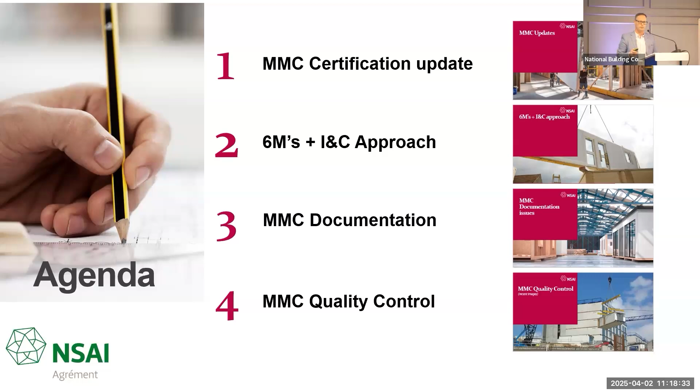So if I just move in on the updates, we have to go back to technical guidance document Part D. That is where NSAI is referenced in MMC certification. There is no European, there is no global standard for MMC. Yes, the BSI published the PAS 8700, but it's only for residential construction and it's only a publicly available standard. So for us to accelerate, what's happening is rules and regulations are trying to catch up with the advancement and innovation happening in the modern methods of construction space. It's for any new or innovative building materials, systems or processes, and that's where Agrément comes into place.

We were mentioned in the Programme for Government. We're here to support that, and to bridge the gap, because there is no CE marking standard for MMC, and it's only for products. But we're looking at the whole building systems, all 67 building elements, the walls, the doors, the frames, and we're also looking at the interfaces. So like what the previous speaker showed you, the connections, the points of connection, the interfaces - they're the challenges for us.

And then there is a European technical assessment, but that is like a visa - it's only a visa to place the product on a European market. It's not your passport to install, because you have to look at the different climatic conditions and locations. We have radon, but we don't have the seismic activities that the Italians have. We had the storm Éowyn recently - they don't have that on mainland Europe in some cases. So you've got to adapt your systems to the area, climatic and local conditions.

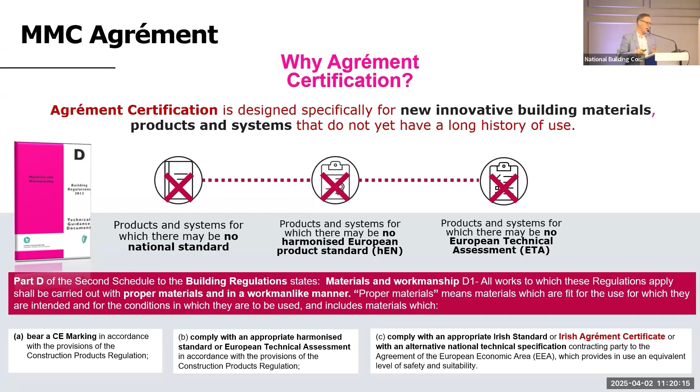And that's set out in TGD Part D. You then can have an Irish standard - we only have IS 440. There is a 3D concrete printing standard, but it's an ISO ASTM standard, and it's only general principles, so it doesn't cover all 3D concrete printing applications. And then you've got the Irish MMC certification, which is to bridge the gap where there are no standards and regulations that I talked about.

But looking at the different companies, what I want you to look at here very carefully - I haven't named the companies, but you can see the date of application and the material type in the second column. I also want you to look at the notes. So we have 7 stages within the MMC certification process, and a lot of them are in technical review, but some don't come back to me - no correspondence since September 2024, no correspondence in 2024.

We constantly reach out to these organizations. They've made an application, they've paid a fee, and in some cases they've signed a contract with us, but there's no movement. And I can't make the move or move forward with them.

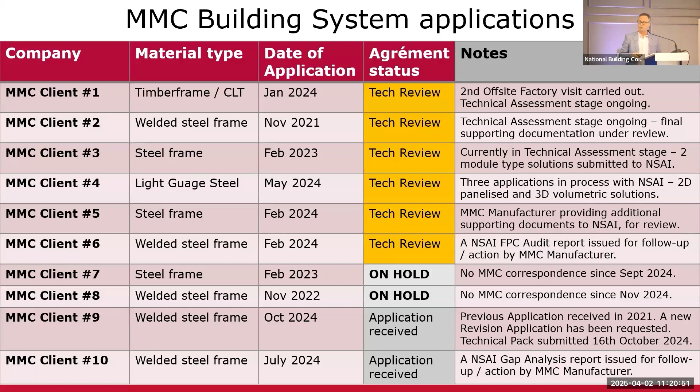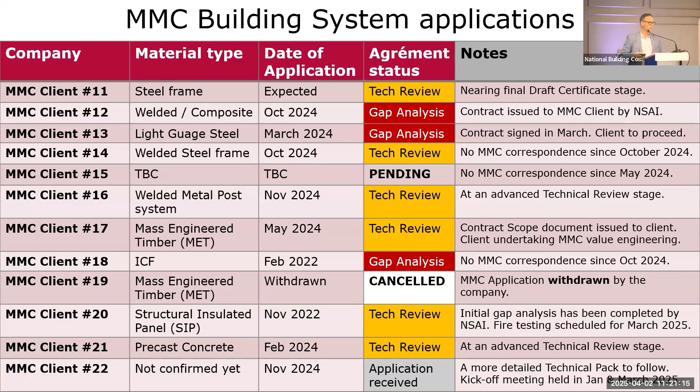Then some withdraw their applications, or some want to put it on hold. We will have a kick-off meeting with them, and we will work with the off-site manufacturers as best we can.

There's different ones that have moved to gap analysis, and for us, we want them to get to the factory production control stage. This is where we're validating all their documentation, all their design, all the good stuff that they say they have. We want to verify that both in the factory and on site, and that's where the challenge starts coming into play. But you can see where they're at, hot rolled steel.

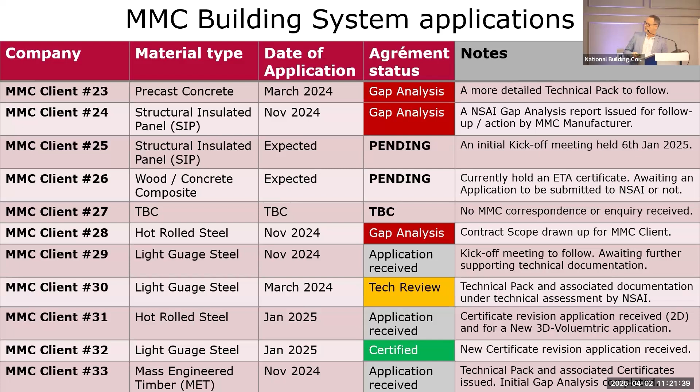It's predominantly very much welded steel frame systems, and then some people are just pending their application. It takes about 6 to 9 months from them making an initial inquiry to NSAI before they come into us and start the process. Then we do a gap analysis initially on what they submit, and it takes another 3 months before they start giving us a really detailed technical pack and we sign a contract with them.

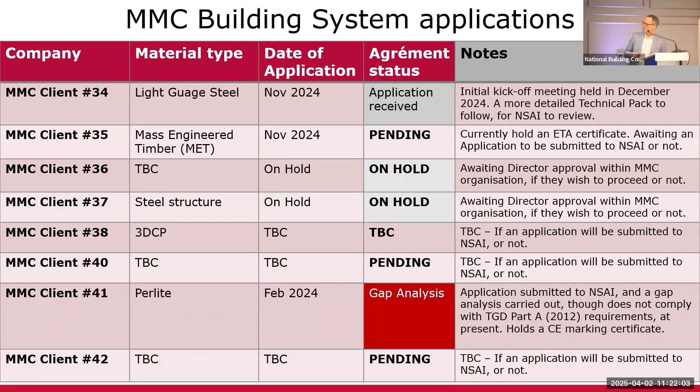So this is the challenges we're starting to see out there. For us, the summary is we want them to engage with us, keep reaching out to our team. We're available, we're contactable. A lot of people have my name and number, they call me, whatever, we're happy to keep that process going. We're here to work with you. We were set up in the NSAI Act 1996. We're also in our NSAI strategy to support SMEs, and we're in the programme for government to improve MMC certification. So that's what we're here for.

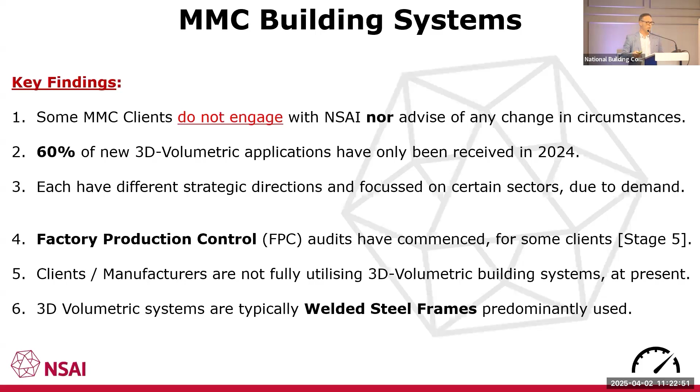What we're also seeing is only 3D volumetric systems have only started in the last 12 months, that's where it's starting to come into it. It's predominantly 2D panelized systems. And what we see is when we get to the factory production control stage, we're at stage 5 of 7, that's a real positive stage. That's when we know the factories are getting ready and they're going to be getting close to certification. We're looking at welded steel frames predominantly, although there's some mass engineered timber starting to make its presence here, possibly due to sustainability targets.

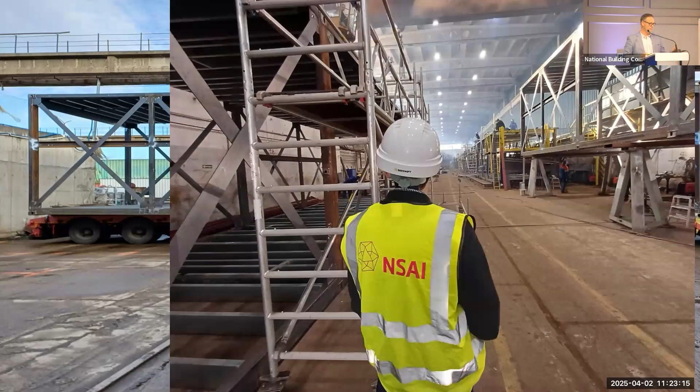This is myself visiting a factory over in Poland. That's the size of the module, 16 tons, not even cladded. When it's finished, it's going to be 30 tons. That was going to a hotel, and this is courtesy of our client. You can see the size and everything we have to look at. This is looking down at the factory, this is one half of it, and there were 4 of them. You can see all the modules laid up all the way down the side and the guys working away in the crew.

This is some of the email comments I get back when I reach out to off-site manufacturers. Apologies Martin, I'm working through the list that you gave me, I'm engaging with our clients and we hope to get back to you soon. Martin, thanks for reaching out, thanks for your voicemail, thanks for your question, but we're not in a position to actively push forward with Agrément certification. However, can we keep our submission on hold?

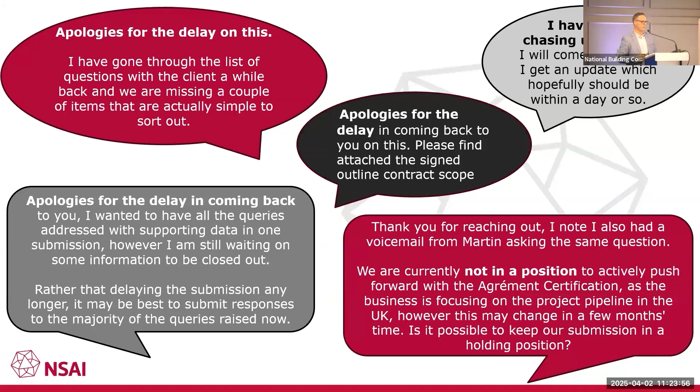This is the type of stuff we want to work with off-site manufacturers on, we want to work with them, but I can't move if they're not going to move forward. So it's a two-way street. You've got to come forward and present your documentation and we'll move forward with you.

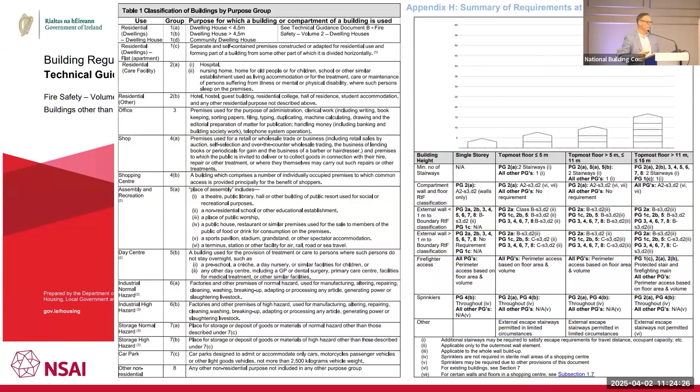What people always say is Agrément is not a one price or one fixed contract. No, it's not. It's based on the different purpose groups, it's based on the different heights of the buildings, it's also based on the material technology and types, it's also based on the scale of the operation. So therefore it can't be a one size fits all, it's not a one size fixed price, fixed term contract. We need to scope that out with the various offsite manufacturers, and then that will determine the length and depth of the certification process and technical assessment we have to carry out.

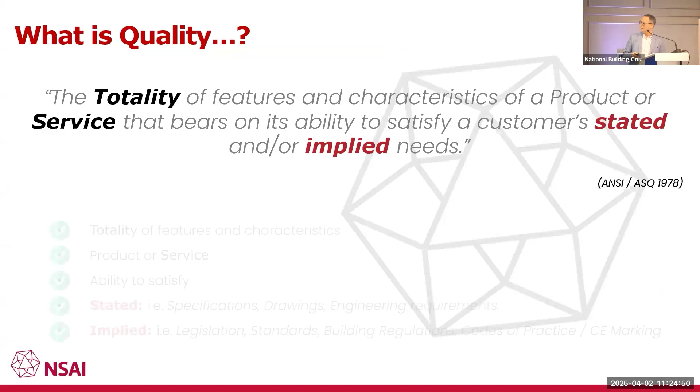This is the 6 M's plus I and C's, so I'll explain what that is in a minute, but I first want to talk about what is quality. This is a definition that holds true from 1978, and it still holds true to this day. It's the totality of features and characteristics of a product or service that bears on its ability to satisfy stated and implied needs. Very chunky, but I'll break it down for you. It is everything you do, the end-to-end process. It's no different to farm to fork, it's factory to site.

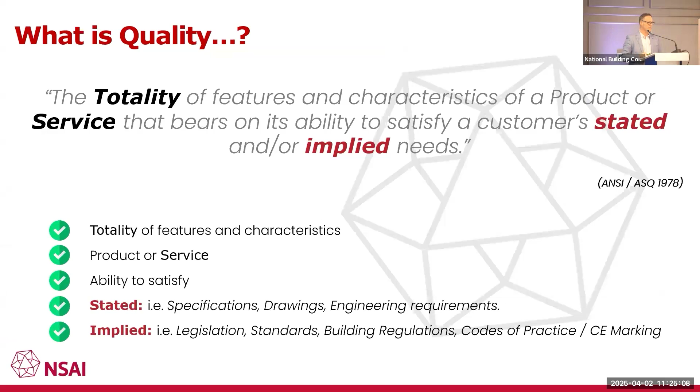It's the product that they're manufacturing, it's the ability, but it's not just the specifications, drawings, engineering, design. It is the legislation, the regulations, the standards, European directives, and the CE marking. It's everything to do with that, and the building regulations that we talked about earlier.

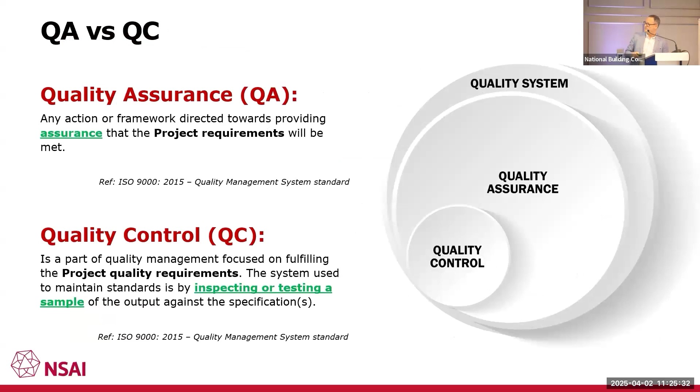Then you look at quality assurance, quality control. Everyone gets mixed up on this. The first one was quality management system and approach, but this is a definition from ISO 9000. It is an action or framework directed towards providing assurance, and quality control, as I always look at it, is materials and workmanship, both off-site and on-site, and how you control that. And it's inspection and testing of those samples. So you're taking a sample of that in the inspection process.

How that looks is we're providing a quality assurance scheme that is relied on by you as the certifiers, the regulators, the warranty providers, the insurers, and the regulator, the building control. And that's where it comes in.

But the BCAR is only on a project-by-project basis. So an example I give you, BCAR is not going to go to a factory in China. Are you going to travel over to China to look at some of our clients? Are you going to go to America? Are you going to go to Poland? Great if you are. But who's going to do the off-site inspections? Who's going to verify that? Who's going to validate all that documentation?

We get huge packs, over 10,000 pages on documentation. I'm happy to give it out to anyone here for them to digest and review technically, or you can rely on the Agrément certification to do that for you and support that. And that's what we hopefully rely on, and we want to work with people on that.

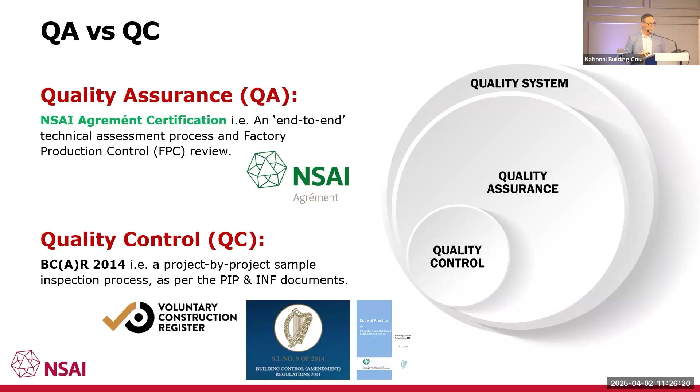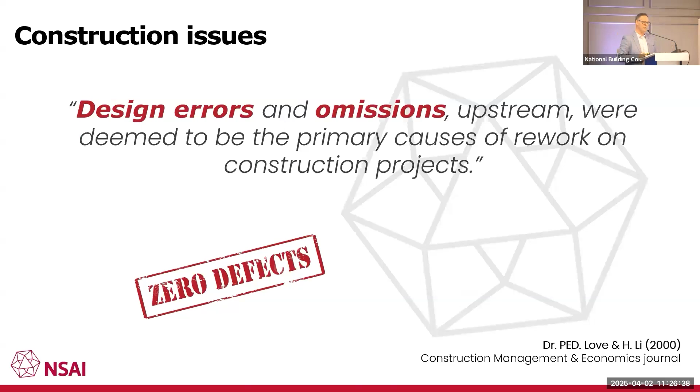And then I always use this definition. This is from Dr. Peter Love and Heng Li. They've written over 400 construction journals. He's in Australia and Heng Li is in Hong Kong. Design errors and omissions are the primary cause of rework in construction. And that is proven in multiple papers that they've published. And that's what we're trying to avoid.

However, when you start into multiple sectors, you start bringing in additional regulatory requirements. So we have the TGDs Part A to M, but then you start going into Design Manual for Quality Housing. There's this new standardized approach that Construct Innovate are doing, looking at different acceptable details for the likes of light gauge steel or other ICF for different connections, but you have the schools design guides. So an offsite manufacturer in the residential sector cannot just pivot into the educational sector just like that. There's a whole series of other requirements and regulations. No different as you start moving up to the data center, the biopharmaceuticals, and then you have the healthcare, HTM standards that was on the National Children's Hospital.

So it's not like for like here. This is where people start telling me it's like Lego and it's nice and simple. There's a lot more variables to this than just what I'm trying to show you. I'm trying to show you the length and breadth of this and how detailed it is.

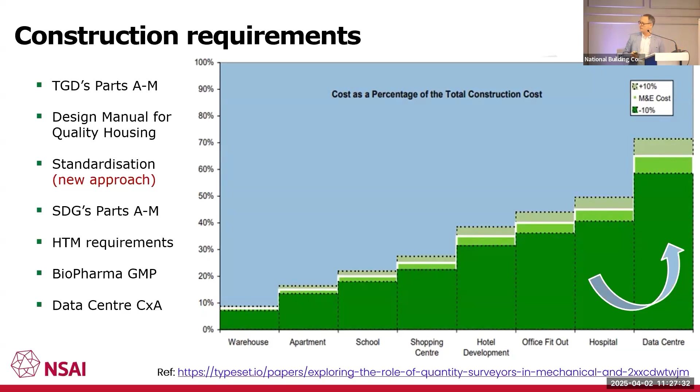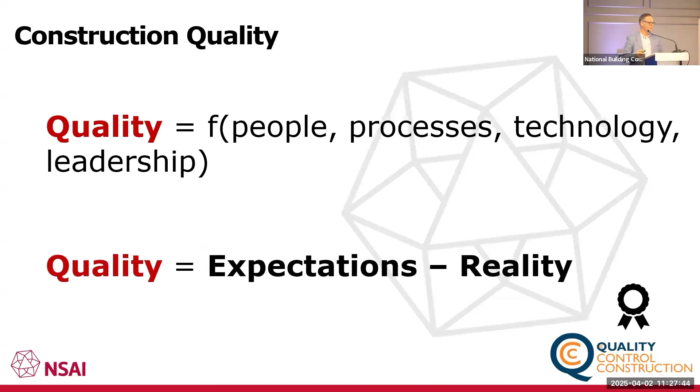For me, quality is a function of the people, the process, the technology, leadership, or more simply, quality is expectations minus reality. What are you actually getting for your off-site manufacturing, and what in reality is arriving on site, and is it fit for purpose and in use.

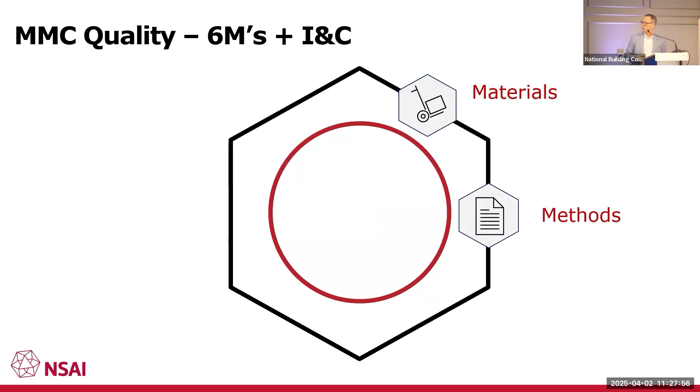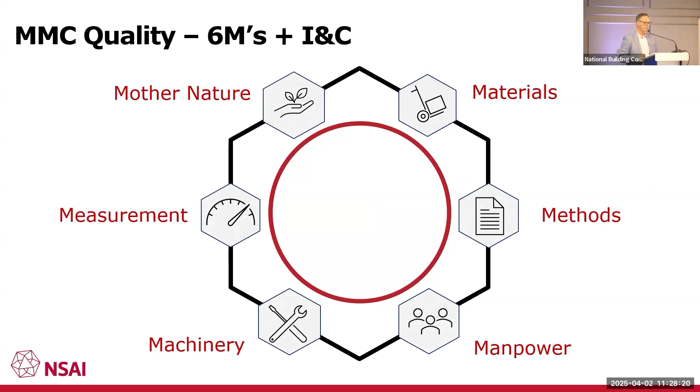So what I always do is 6 M's plus I and C. I look at the materials. I look at the methods that they're employing, both on-site and off-site. I'm looking at the manpower, the competency of both the design team, the professionals and the trades. I'm looking at the equipment, the tools. Is it calibrated? Is it verified? I look at the measurement, and what I mean by that is inspection, testing, quality control records, the checks and balances. And I'm looking at how the weathering, the protection, and how that product will interact. Is it UV rated? Is it going to degrade over time? That durability that we talk about.

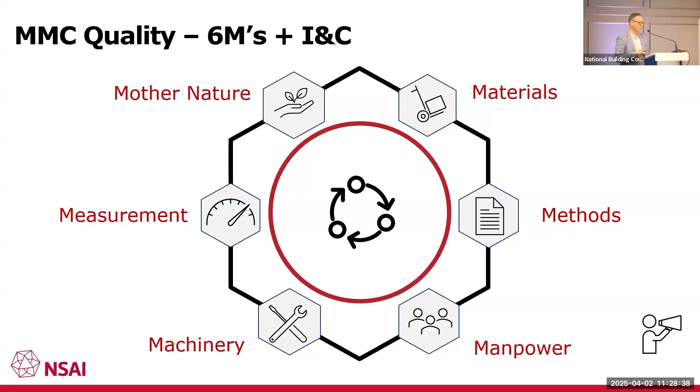And then I look at continuously improving that process, and then how we communicate that. So that's my 6 M's plus I and C. It's project neutral, it's material neutral, it's sector neutral. I've applied this for the last 30 years on all the projects I've ever worked on, and it works out perfectly. I challenge you to try that on your projects and your processes. I'm looking at the specifications. I'm looking at the storing, the weathering, protection of it.

Over, short, and damaged - does the module arrive like that? Has it got something too much on it? Is it missing something? Is there poor interconnection at the interfaces? I'll show you some examples of how this has happened.

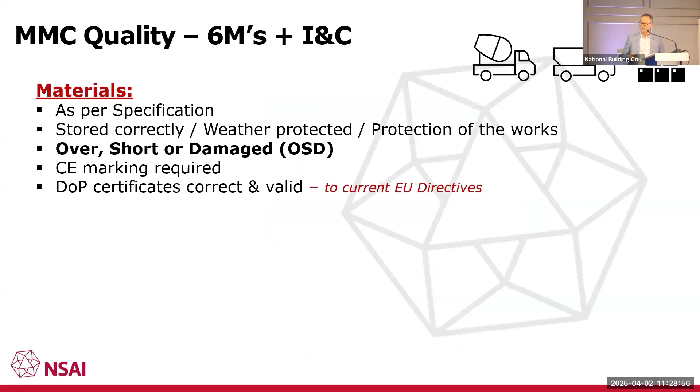Even though we have 3D modeling, this should not happen. Everything should be documented and detailed. Has it got the CE marking? Has it got the declaration of performances? And are they checking it? Is it fit for the essential characteristics?

We're also looking at the contract scope of works. Has there been any variations and changes? Looking at the models, requests for information, technical queries, and we're keen on the standard operating procedures - the offsite manufacturer's processes. We're not here to challenge and question that, but we want to see it. We want the evidence, we want to see the validation and verification of that. Trust me, I'll go into full detail on this.

I want to see it in the PIPs and the INFs. I want to see offsite manufacturing captured in that and the stages of inspection. Where is that? Is it there? I do see it in some of it.

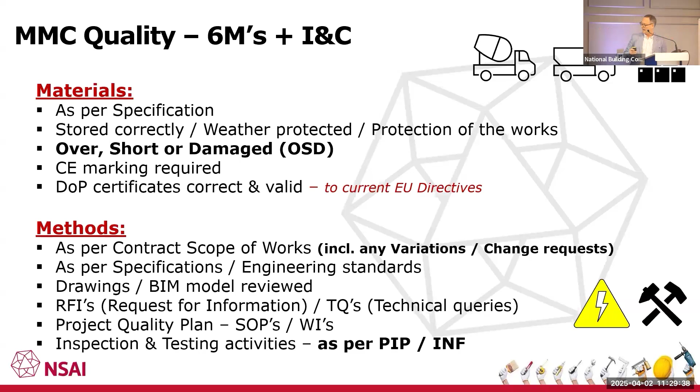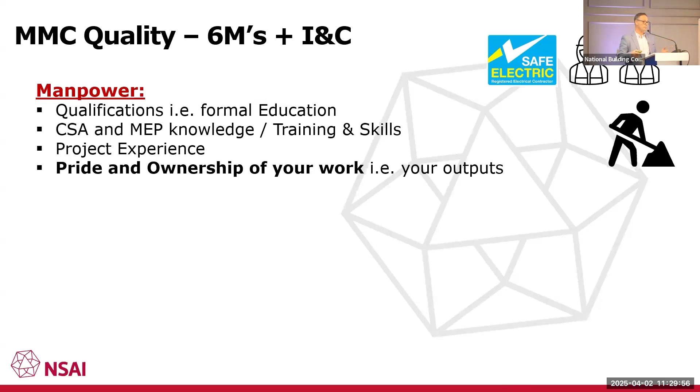I'm looking at the qualifications. What we mean by qualifications is in TGD, the definition - are they competent? Competent means qualifications, knowledge, experience, and skill. That's what we're looking for, a combination of all of them. The problem with experience and skill is modern methods of construction is new, so we all have to upskill, get more knowledgeable around this. I'm learning every day.

And then it's taking pride and ownership in that, but it's also having the right tools to do the job. So we're looking at the torquing, the bolting, the assembly, the points of connection. That's when a modular is going to fail - at the interfaces.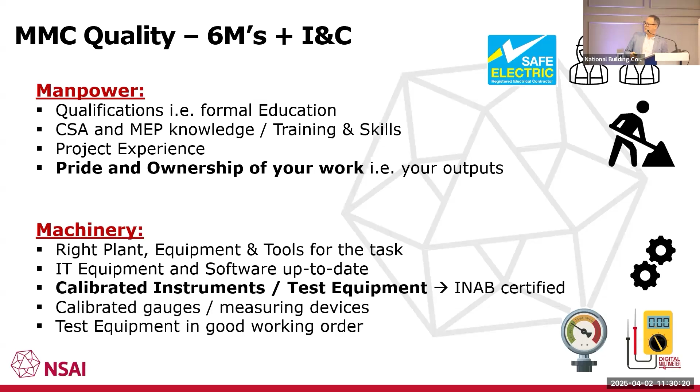If you look at any of the reports over in the UK, it's at the interfaces, where things come together. We're looking at whether the equipment you're using is calibrated, the gauges, and they're all in working order. And then finally, we're looking at the quality control checklist, the test packs, the evidence that verifies or validates - that's the track and trace.

I don't mind if it's pen and paper. I don't mind if it's digital. I don't mind if it's on an app.

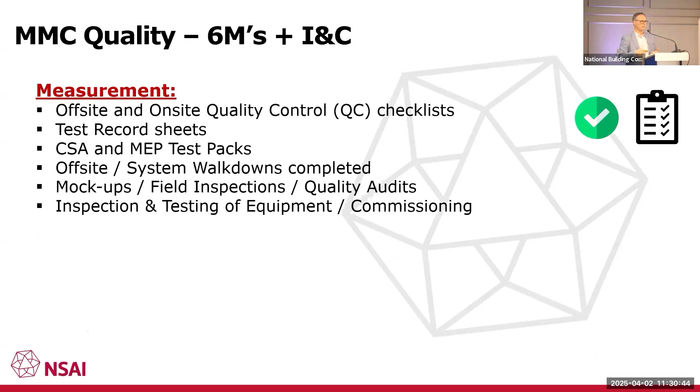But what we do is we go into the factory and they tell us all about these wonderful checks. We get to the end of the process and we start seeing errors in the modules and things. And I said, but you just told me we go through 100% checks - and yet we see gaps and errors in the process and the system.

And then Mother Nature - be very careful. Program affects how people operate. When you start putting things under pressure, people perform differently. So it's the environment, the culture, and that's why factory production control lends itself - offsite, it's a nice controlled environment as opposed to onsite, chaotic, multiple trades. You're also looking at the weather, the temperature, and that's why offsite manufacturing lends itself to drive improved productivity, and that's been proven in numerous reports.

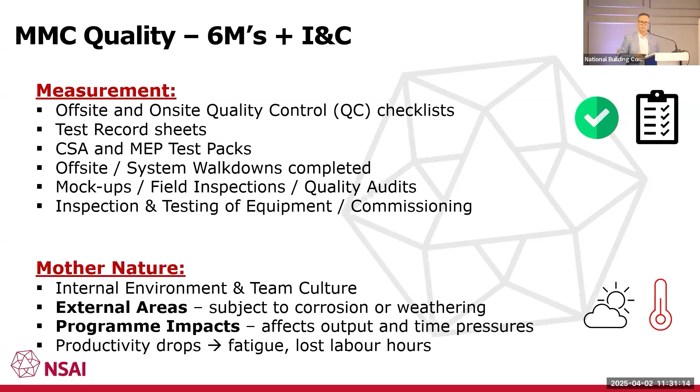And where this all comes from is the fishbone diagram, root cause analysis - Ishikawa, it's been around since 1980, and every time I had a quality problem, one of those ingredients was always missing, one or more. So if you go back to look at any problems or issues you've ever had on a project or site or in a factory, one of those ingredients - you can drill down to it. Don't look at the symptoms, look at the root cause of the problem and drill into it and then try to prevent it. What I do is the reverse of that.

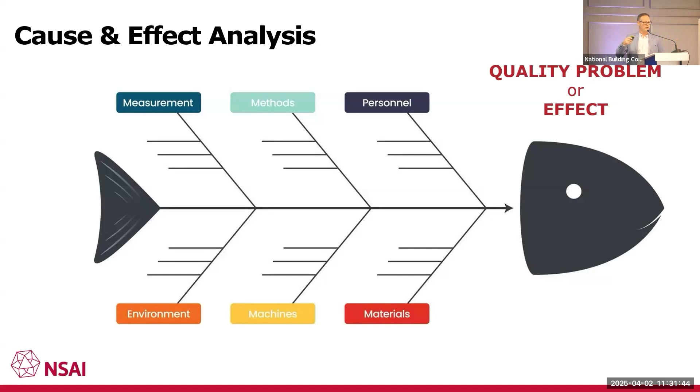So it's nothing new or novel or innovative, it's very simple. What you're trying to do is get into a nice zone of control. You're taking out these sporadic spikes, these unknowns or variables, and you're driving that quality improvement. But what's key is you've got the lessons learned, the feedback loops. So the best organizations are feeding that back from the offsite activities, back into their production, back into their crews, and they're constantly improving.

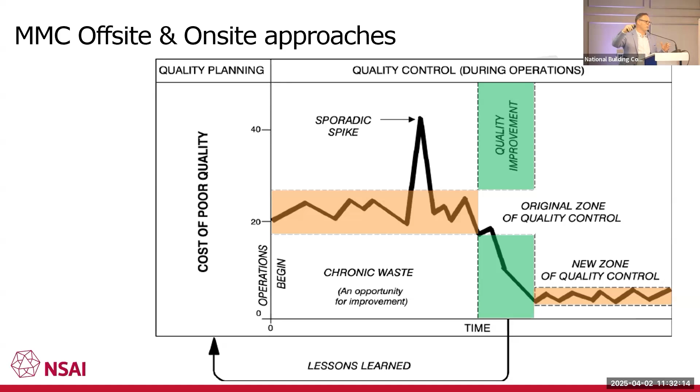You'll see that with the offsite manufacturers - I see a maturity level with a lot of these companies. Some are really good and innovative, and others are quite stagnant and slow and don't take those feedback loops and learn on the process.

Just touch upon some of the documentation that we're starting to see out there and the issues. So we're looking at everything, the durability, the thermal, the structure, the fire, not just the TGDs A to M. We're looking at the competency of the people, the test results, the calculations, the quality control. I'm looking at the end-to-end processes with my team. We're looking at everything. I want to see it all.

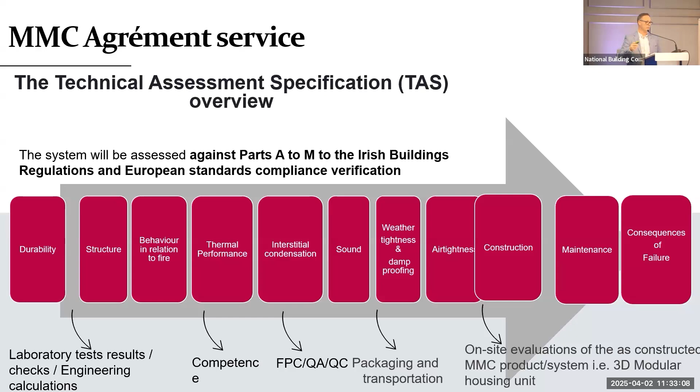I don't care what you do. I don't care how you manufacture it. I'm not here to challenge your processes or what type of material you're using, but I want to see it. Manuals, the installation manuals, and the maintenance around that, because just when the module's finished and installed on site, we want to see how it's maintained post-production and post-occupancy. So just be careful of that.

My three challenges - this is the slide I want you to take away from today. Documentation. It doesn't always match what it says on the tin. The amount of times I get pieces of paper, out-of-date documents, documents that don't match the essential characteristics - I challenge you all to look at this documentation. Look at the devil in the detail. Look at the European Technical Assessment. What does it cover? What doesn't it cover? What's in the manufacturer's instructions? What's in the literature? Factory production control, that's 80-90% of where it is.

So when we go to the factory, it's not bad. It's getting better, it's improving. But we still see errors out there. We see some very basic checks that weren't done or carried out. Small attention to detail - and that shouldn't be happening on the production floor, using the right jigs. But they are improving. The on-site is not where it needs to be. It is not at the standard or level.

It's like a curbside delivery. They drop the modules in, or drop the 2D panelized systems, and a different team or different crew takes it over. The control around that and the interfaces with the various trades is not there. I don't see it as strongly controlled as it would be in the factory, and it's an area that we need to look on.

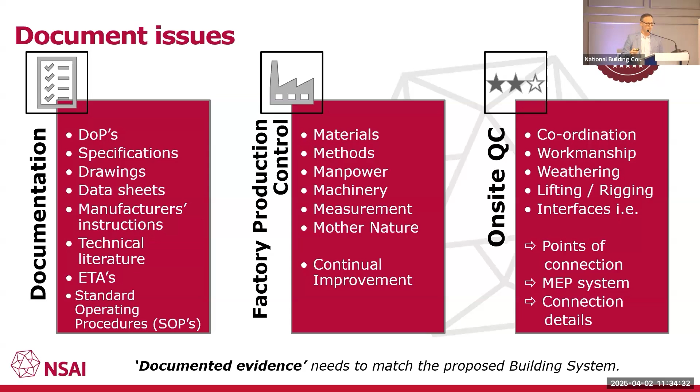We need to look at the points of connection, even the mechanical and electrical, and how that interfaces with the module. I've seen them compromising some of the modules. It was my fear, and that's what I'm starting to see on the sites now. So I will be pushing in on that, and I will be doing unannounced visits on some sites.

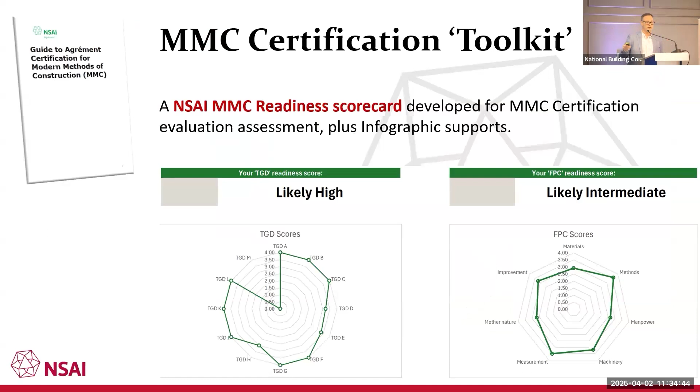We have a readiness scorecard to help organisations. It's very freely available, it's a self-assessment. It's against the TGDs Part A to M, and then it's also against factory production control readiness. We score it against what the off-site manufacturers provide to us, and it gives you a nice radar diagram that tells you where your gaps are.

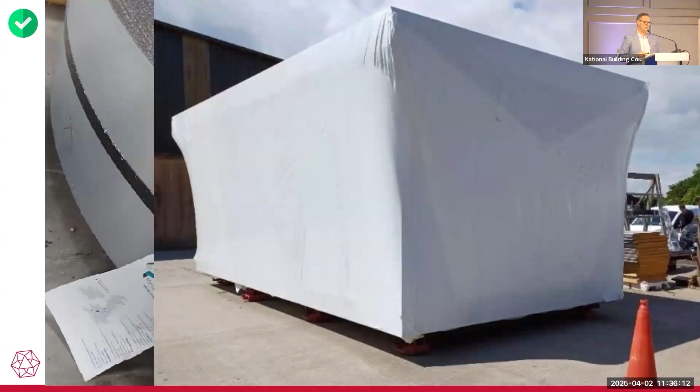And then just to wrap up, I just want to show you some of the recent images that we've seen. We see some good stuff with light gauge steel. We can see the material traceability, we can see the mill certs, and we can see the material. We can also see that they weather the products better. So really good companies are weathering their modules now, and that's what Mario talked about, the weathering of moisture. Moisture is going to be your biggest trouble here with these modules and getting exposed to the climatic conditions here.

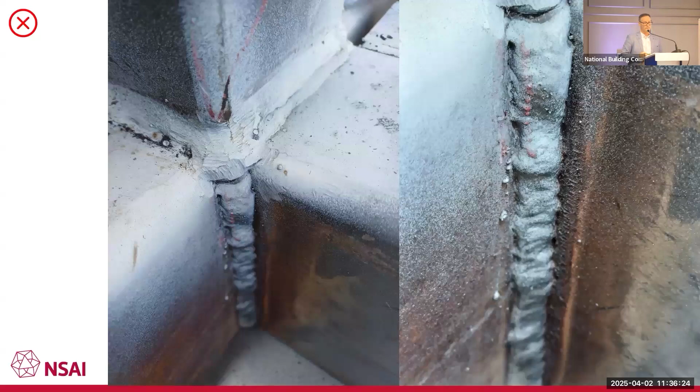This is a weld. We'd gone to a factory and we asked them what inspection levels they do - 100% visual and 10% non-destructive testing. The white paint is magnetic particle inspection, a form of NDT. That was for the other welds, and this is the quality of the weld I got.

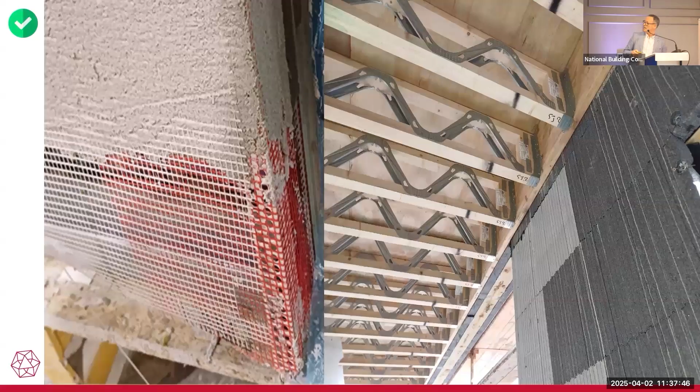And this is another site with ICF. But then I see some really good stuff in the factory where they were doing the rendering, putting on the mesh, putting on the base coat, and they can see that they're doing the posi joists in the correct orientation on the ICF. So they can do some good stuff. It's that education and training and knowledge piece that I talk about with the checks and balances.

So just to wrap up then, in summary, for me it's about looking at these six key elements. If you are doing any inspections or audits or assigned certifier or design cert roles, do go to the factories, do apply this methodology, and I'm telling you, it'll work really well for you and always continuously improve. So thank you very much.